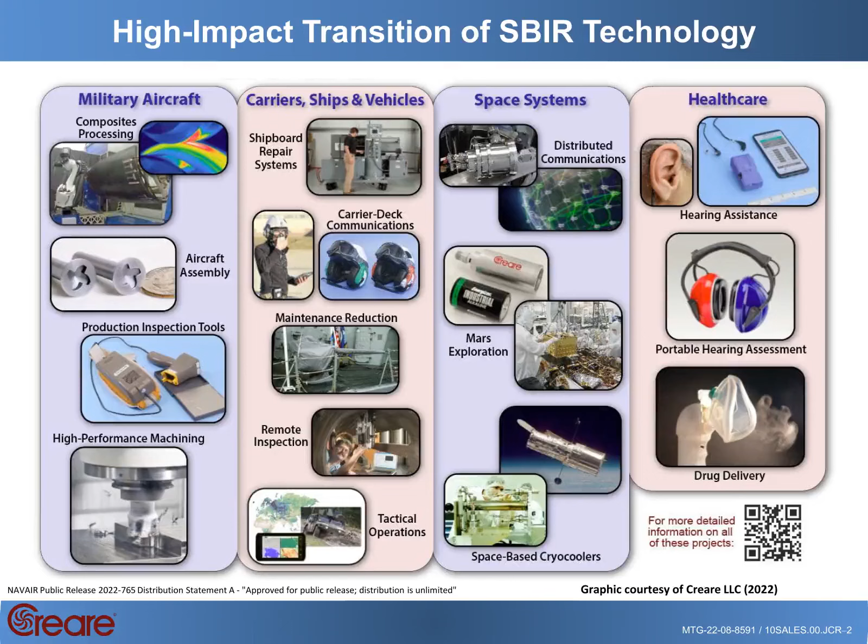For background, the Fastener Measurement Tool, or FMT, is a currently fielded device used for rapid, highly accurate inspections of unfilled and filled fasteners on the F-35 production line at Lockheed Martin in Fort Worth, Texas. Fundamentally, our FMT replaces several time-consuming, inaccurate, and subjective methods to measure fasteners to ensure low observability compliance.

Since its introduction to F-35 production in 2017, the FMT has demonstrated substantial benefits, including reduced touch labor, a reduction in the number of inspection tools, and escape prevention. Most critically, the FMT has been a key enabling technology for F-35 production to achieve full rate, which is required to meet agreed upon cost targets. Currently, over 100 FMTs are supporting production in Fort Worth.

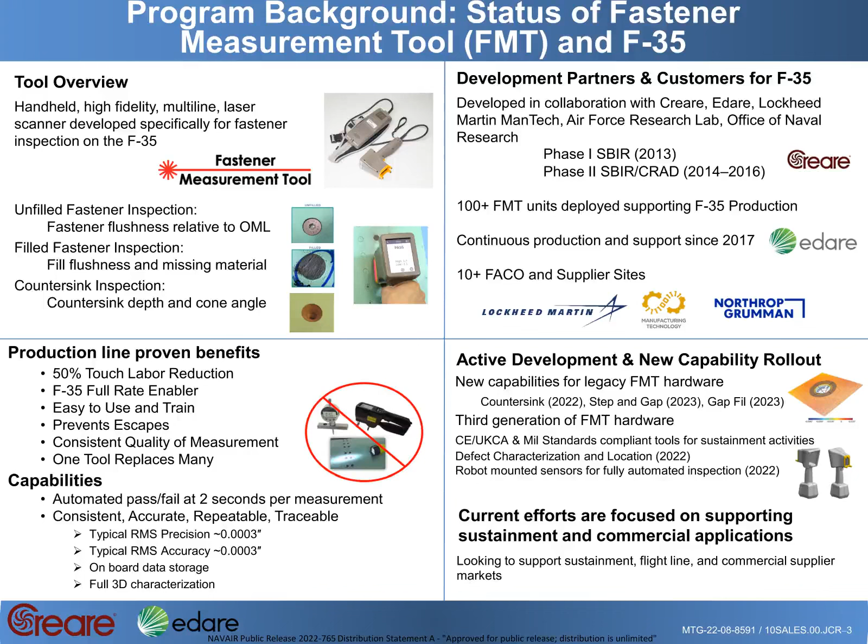The current technology transfer program focuses on further software and hardware enhancements to the FMT to broaden its reach for F-35 sustainment and other programs. First, the F-35 program expressed a strong desire to extend the capabilities of the FMT into countersink measurements. While measuring unfilled fasteners can catch non-compliant assemblies, the ability to measure countersinks and virtually install a fastener can catch these issues further upstream in production, enabling possible corrections before parts have been assembled.

Second, there was a desire to revise the FMT hardware to remove the belt pack and create one unified tool platform while addressing the desire to use the tool in the EU and UK markets for F-35 and other programs.

Third, we determined that there was a strong need for an FMT-like solution for damage assessment or sustainment on the F-35 aircraft during operations. Currently, such damage is cataloged by operators using Mylar sheets to transfer the damage geometry from the aircraft to the flat, traceable screen of a computer. Not only is this process highly inaccurate, it is extremely time-consuming. Having a repeatable and automated point-and-shoot flight line option for post-flight damage assessment and integration into larger-scale performance models will reduce operational maintenance burdens and get the aircraft flying sooner.

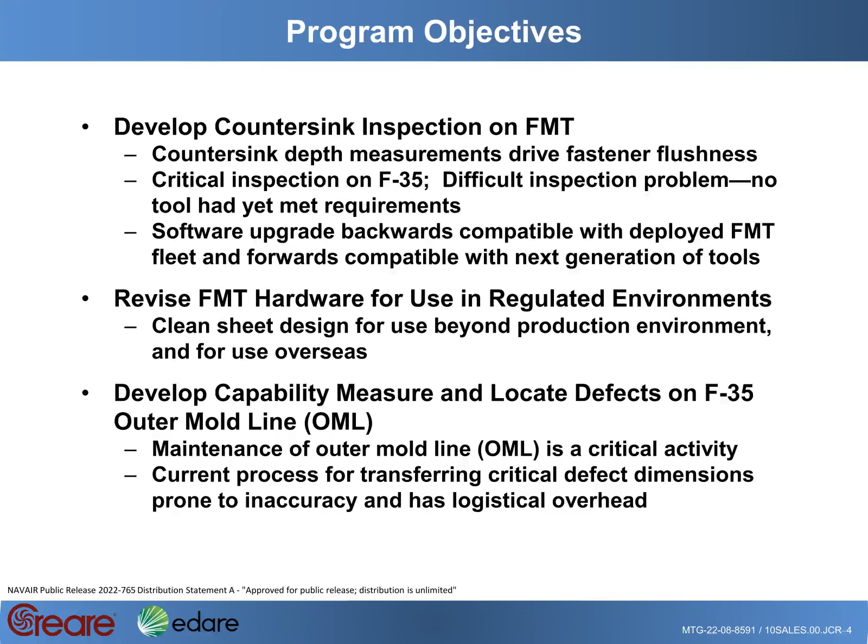Countersink measurements have been completely developed under this SBIR program for the existing FMTs in use and all future units. This capability enables the requirements for unfilled fasteners to be applied before a fastener is installed, which facilitates corrections further upstream in the manufacturing process. While many fasteners on the aircraft are as simple as the one in the upper left, there are a large number of special cases that we worked with Lockheed to successfully address before full implementation of countersink measurement.

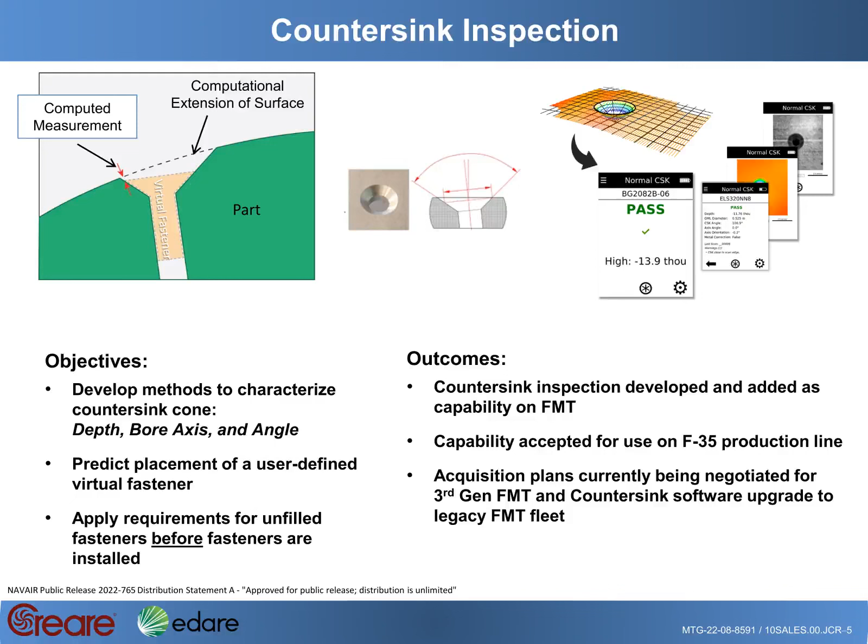We have also focused on upgrading the FMT hardware in this program. First, we eliminated the belt pack to create one unified tool that will be easier to use and more robust. Second, we developed design approaches to address various regulatory requirements in the EU and UK, as well as specialized requirements related to operating near fueled aircraft. Third, based on the upgraded FMT design, we developed a prototypical tool platform for defect measurement, which combines the measurement of the actual defect with a wider angle measurement to assist in locating the defect on the aircraft automatically.

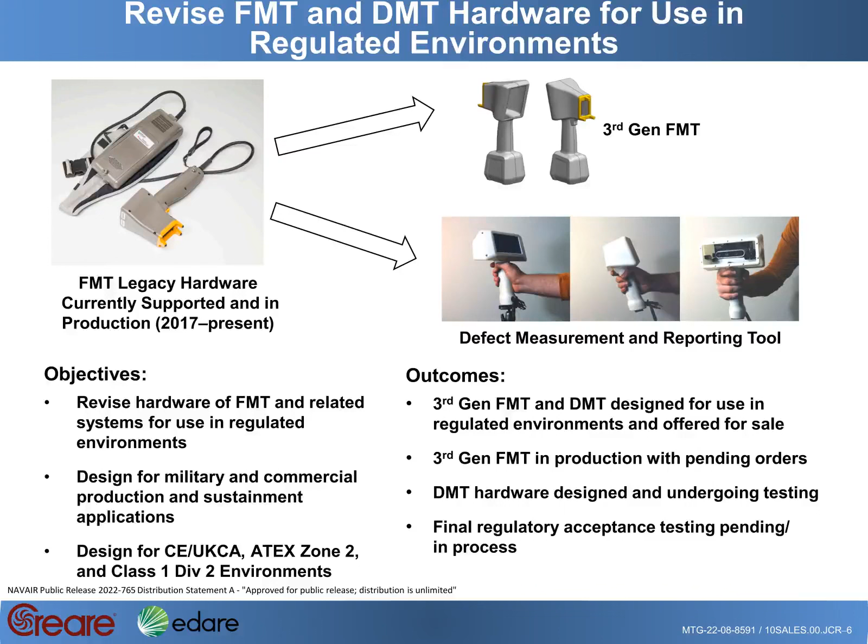With respect to the defect measurement tool, or DMT, the next slide describes the overall process in more detail. The idea is to reduce the inspection time for a particular defect from many minutes to seconds, while dramatically improving the geometric representation of that defect. Because of the limitations of the current inspection process, engineers and operational staff spend many hours, and sometimes days, trying to exchange detailed information about particular defects on critical areas of the aircraft.

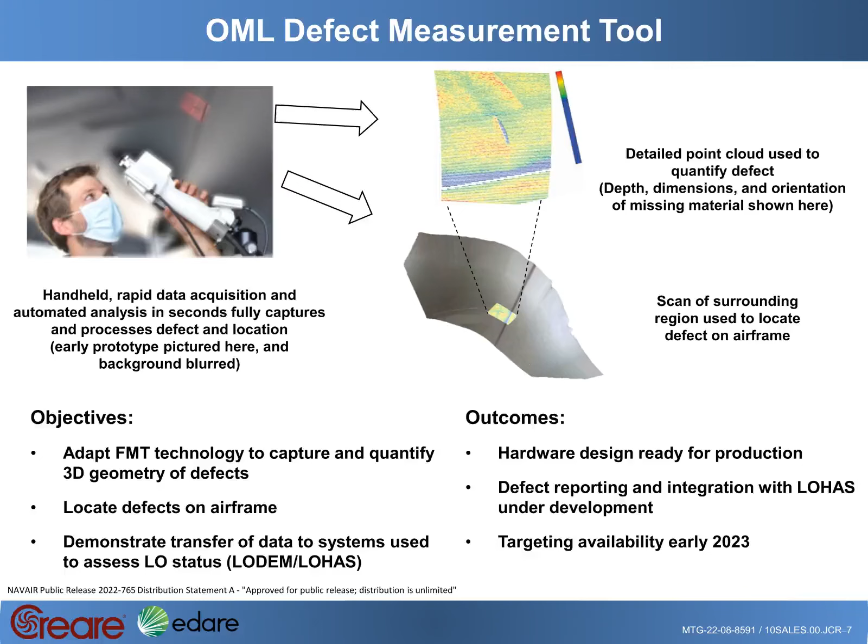Our tool not only creates a high-fidelity, accurate digital representation of the defect, the scan of the surrounding area, coupled with a novel software algorithm, enables the accurate location of that defect on the aircraft OML, as shown in more detail on the next slide.

The direct scan of the damaged region using the DMT is translated to a map that can be used to directly display critical information, such as the characteristic length and width of the defect, its maximum height, volume, and area. Importantly, the DMT also provides a detailed measurement of the depth of that defect. As mentioned earlier, the separate large area measurement inherent in the DMT is statistically matched to a model of the F-35 airframe to automatically locate the damage on the outer mold line.

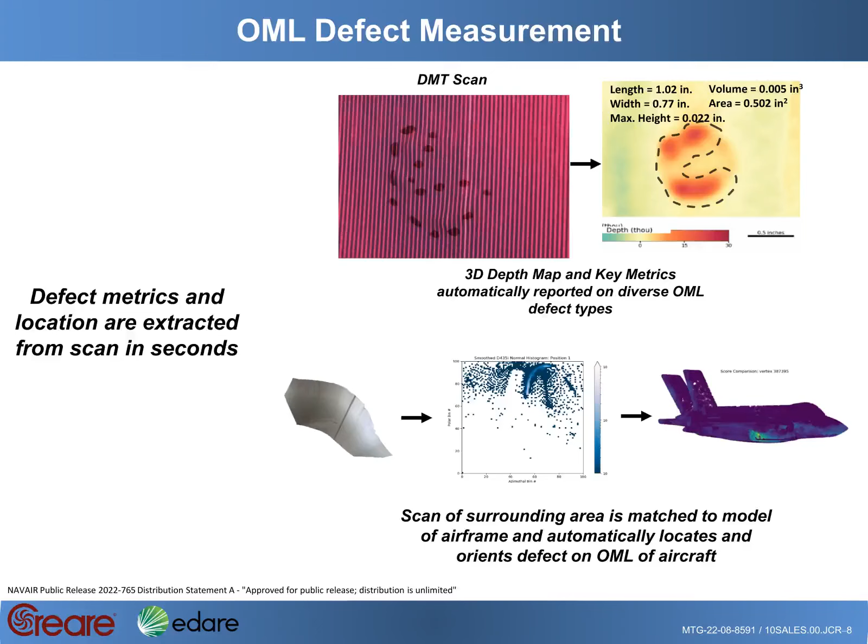We have conducted numerous tests at a local Air National Guard base in Vermont that is flying F-35s. These tests have provided critical data and demonstrated the numerous advantages of our DMT relative to the current process. These include the automation of defect measurement, localization, tracking, as well as reduced labor, decreased aircraft downtime, and overall improvements to aircraft performance assessments. The current program will result in DMT prototype hardware and software, and future development will aim to productionize this system with a focus on integrating with current aircraft performance tracking tools such as LODEM and LOHAS.

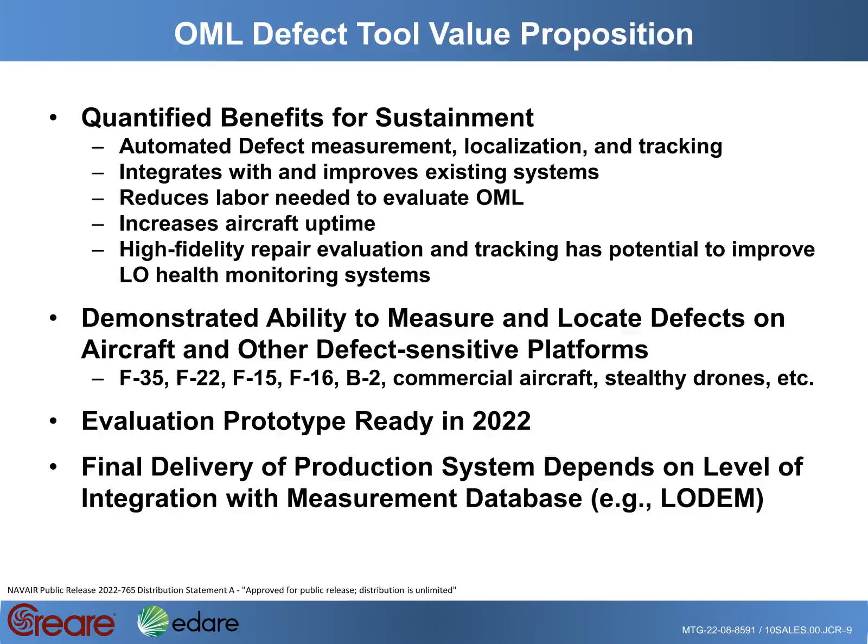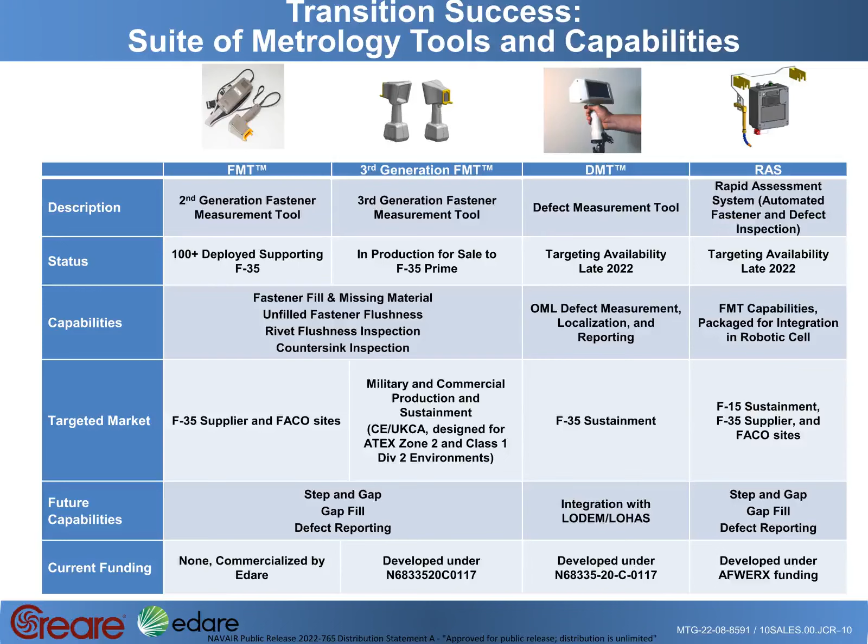Creare and our affiliate Edare have become key suppliers of high-performance metrology tools for aerospace applications. These span the two versions of the FMT, the DMT, and a robotically mounted version of the system currently being developed to inspect F-15 aircraft wings at Robins Air Force Base. The Creare Edare team is a model for successful innovation, technology development, and transition through the SBIR program. Additionally, Edare is working with respected aerospace distributor Accurex to increase the market for FMT-related products to the commercial aerospace market.